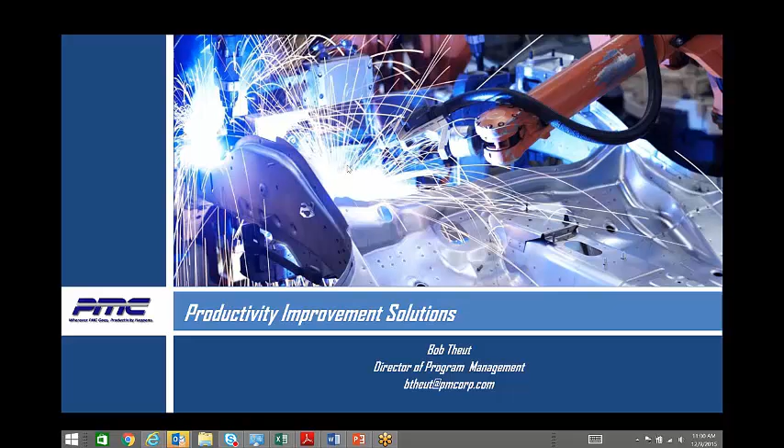We're going to go in there this morning. As Danielle talked about, we're going to talk about some services that PMC offers and different tools that we can utilize to help your production and increase your efficiencies in your site.

PMC is an engineering manufacturing consulting firm. We're a full-service industrial engineering and IT consulting firm providing process improvement services and software to manufacturing and service industries. We utilize a solid mix of experience, knowledge, and creativity, and we always find ways to improve the quality, efficiency, and productivity of manufacturing and service industries.

Some of our specialties in consulting services include advanced manufacturing, material handling, supply chain management, facility layout and design, CAD services, industrial engineering and lean manufacturing, simulation modeling, and program and project management. We also offer staffing and training services, including training in CAD, simulation, and MODAPTS, and many other services if you're interested.

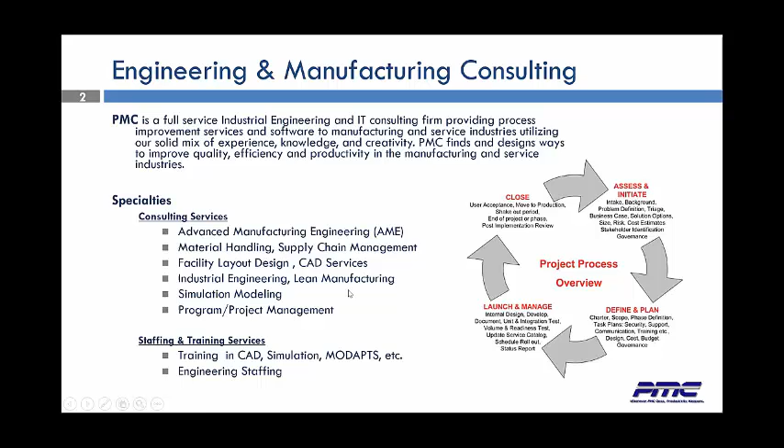In our advanced manufacturing and engineering, our expertise includes industrial engineering and work measurement, labor analysis and scheduling, ergonomic studies, Six Sigma, line balancing, and layout analysis.

In the simulation area, we include increased throughput, capacity verification, enterprise profit model, waste reduction, constraint management, work in process inventory, and direct and indirect labor utilizations.

We also go into lean manufacturing where we standardize work, process system simulation, value stream mapping, workplace design, and ergonomics. We look at workplace organization, better known as 5S, additionally 5T, waste reduction, the 7 wastes, SPC, error and mistake proofing, visual management, problem solving, and team concept.

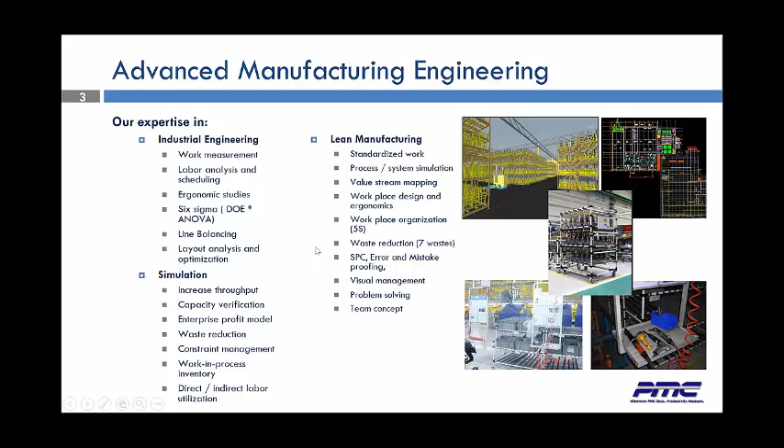Additionally, we do material handling. We look at material handling density analysis, resource allocation, production planning, flow and process management, inventory management, indirect labor optimization, Kanban optimization, and material display and part presentations.

In the digital engineering area, we offer CAD services including installation drawings, layouts, scanning, and conversion. We even go further into that—if there's more information you would like, please contact us. We do 2D and 3D design in digital engineering.

In supply chain management, we cover advanced planning and scheduling, network optimization, risk management, finite capacity scheduling, inventory reduction, project timeline and cost reduction, and material flow and layout optimization.

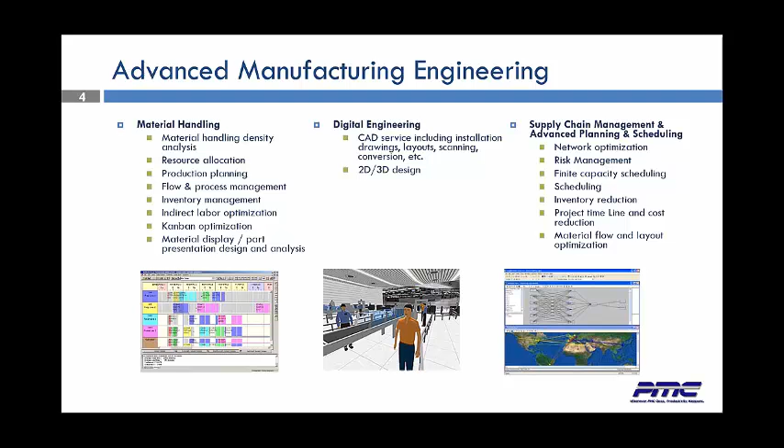Let's talk a little more about production control and material handling engineering. We look at the overall layout showing a warehouse, including the staging areas, the routing, the aisleways, any monuments, docks, and additional items within your warehouse. We also create detailed layout diagrams, 2D layouts, including stations and assembly lines.

We look at a station-by-station line display, which includes the material and also the equipment that the material is laid upon. A summary of the material handling equipment requirement is a vital part of what we also do.

We can show you and better right-size your fleet. We do a static dock analysis for future state dock analysis, including labeling and inbound and outbound. We look at all this to ensure you have the proper amount of dock space, or to see if we need to add additional space or redesign the area differently.

We also look at a storage analysis outside of the docks for future state storage space requirements, such as small lots, bulk, staging, empty racks, and finished engines, if that's the case.

In the material flow area, we look at the part delivery sequence. We can optimize the sequencing of the fork trucks and/or the tuggers, or even just the hand delivery of parts. We can better minimize the dollar spent to support the projects.

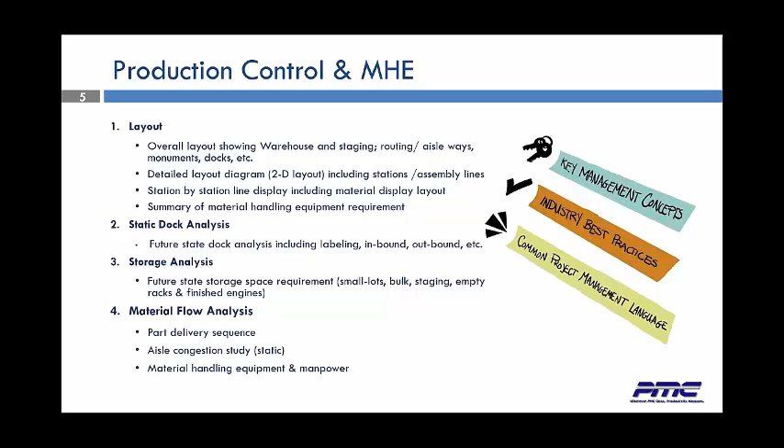We look at aisle congestion in a static or dynamic type, or a static simulation type study. We also look at the material handling equipment and the manpower required, and a better way to optimize that.

In the industrial engineering area, we look at different types of work measurements such as MODAPTS, MOST, and time and motion studies. Those three are different forms of calculating the amount of time it takes to do a particular task or many tasks, or possibly even looking at the overall operation of your plant or operation.

We do a labor analysis, labor scheduling, and workstation design and optimization, as we talked about before. We like to concentrate in the ergonomics and Six Sigma areas also. So, a little more on material handling.

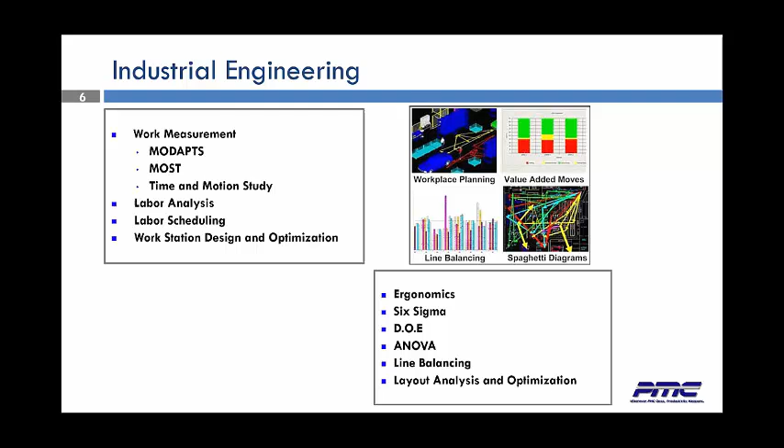In material handling, we usually start out building a PFEP database. PFEP stands for Plan for Every Part. We'll go further into exactly what a PFEP database is in the next few slides.

We really concentrate on the material display, ensuring that we optimize all that. We look at the kitting, the sequencing, and sub-assembly area design, sometimes called cells. We look at delivery route design and workload balancing to ensure that the fork trucks and the people all have optimal workloads.

We try to keep the workload at the 90 to 92% range. We look at dock and storage analysis, and engineering and visualization services. We'll look at laser scanning and 3D modeling. We'll also take a look at some F&E equipment, facilities and equipment, looking at special containers and new equipment orders.

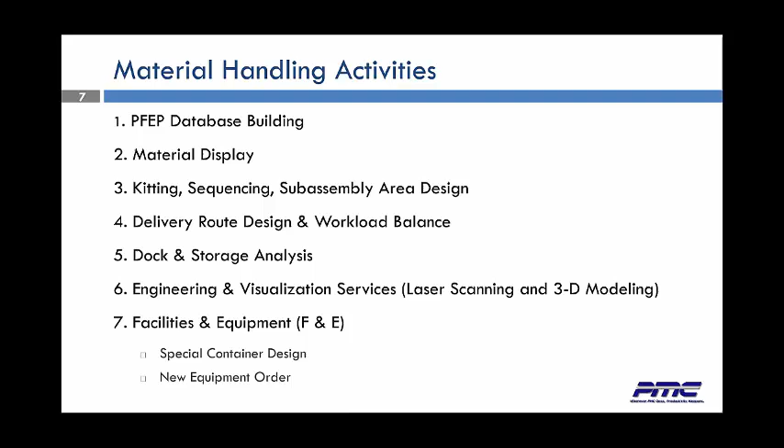In the plan for every part, the PFEP, some of the information you might see in it is part data, which consists of part number, part name, part description, program, the variation, the part weight. We look at supplier data. We look at containerization data.

We also look at any sub-data, subassembly data, such as the delivery route, the delivery method, supplier container number, and the location that will be used. And we'll take a look at the final assembly data. All this information is put onto one spreadsheet or one database, depending on what you prefer, so that it can be used by each and every department rather than every department having their own little category.

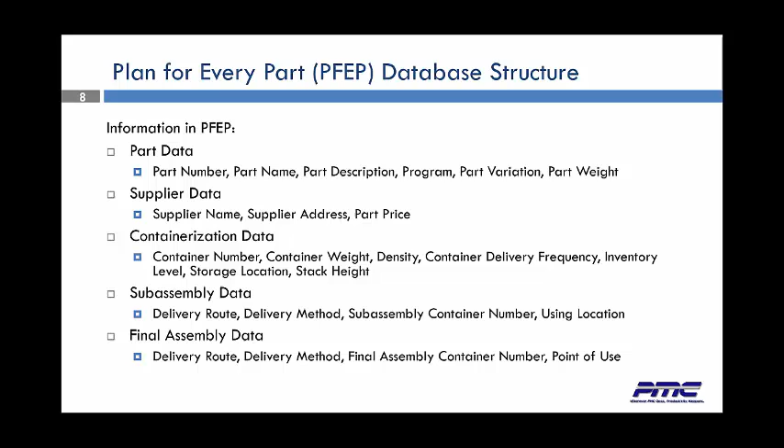By minimizing the amount of space utilized, we can maximize the safety and also maximize the golden zone, which we'll talk about a little bit more. We minimize material handling by eliminating MURIs, which are difficult and unnatural operations, also MURAs, irregular operations, and MUDAs. By doing all this, it automatically improves the workplace ergonomics.

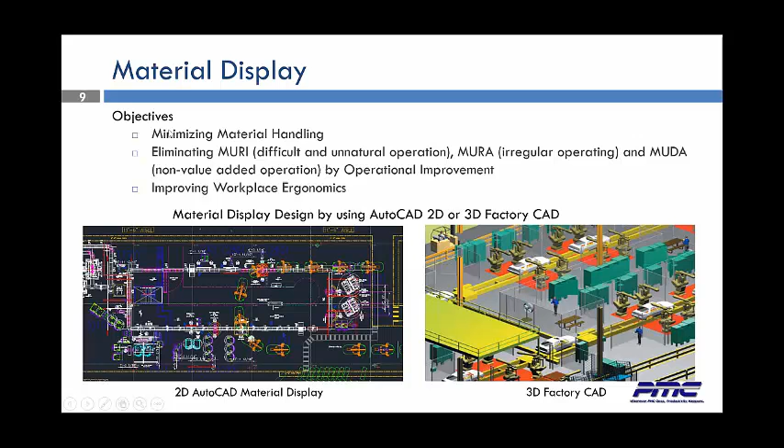In the material display, some of the methods we'll use to optimize everything are a single pick point or even a single pick face. We use different pieces of equipment such as turntables, gravity flow racks, ensuring that we're always within the golden zone. We'll even use kitting, risers, and ergonomic platforms as required.

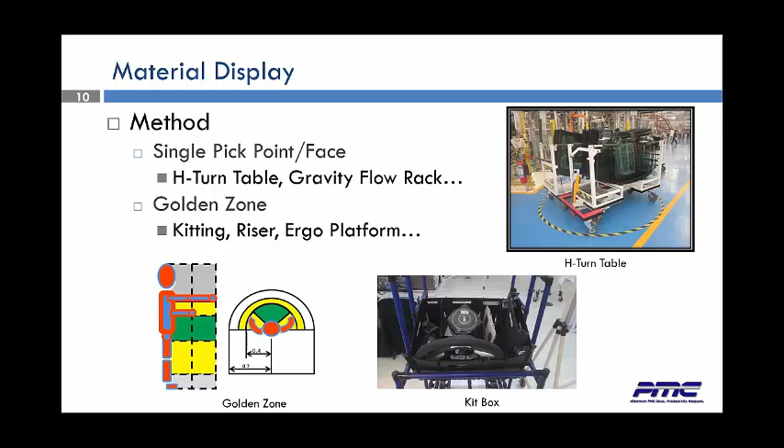Some of the material flow logistic guidelines we follow: we always present parts in the golden zone. You might be asking, what is a golden zone? A golden zone is an area directly in front of the operator, where they don't have to turn around, where they utilize a minimal amount of movement in order to put the parts to the line or put the object where it belongs.

This might be a better way to say that: thereby never having to turn around if possible, and not having to reach too far or take steps in order to do it. We can minimize the amount of time it takes to actually do the task, thereby speeding up the production.

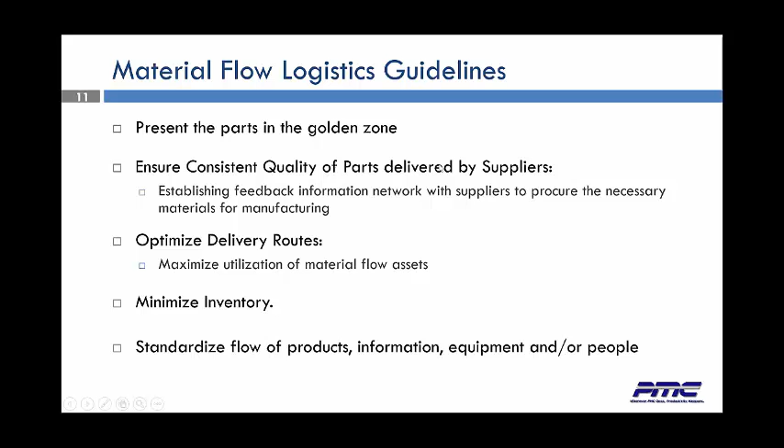We always optimize the delivery routes by maximizing utilization of the material flow and the assets. And we minimize your inventory. Inventory is an extremely expensive concept and it takes up a lot of floor space. So if we can minimize it, we can give you additional room to bring on additional work and additional customers. We look at the standard flow of the products, the information, the equipment, and even the people, by optimizing each and every one of them.

The delivery route design and workload balance objectives are to reduce indirect labor, standardize the delivery procedure, reduce material handling equipment and investment, and reduce aisle traffic congestion. If you take a look at the examples we have, you can look at the example of tugger routes and the before and after of the routes. Thereby, we actually eliminated one complete fork truck and also driver.

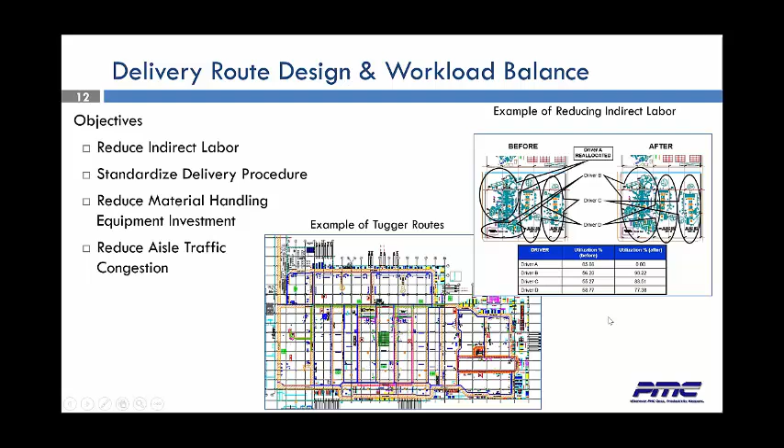The savings could come out to hundreds of thousands of dollars in a year, depending on the type of equipment you're using. One of the big ways we reduce all this is by looking at kitting, sequencing, and sub-assembly cells. The question might be, why do I kit?

Well, you kit for productivity purposes. It minimizes the movement of the operators, it places all the parts always in a golden zone. The quality is increased, you minimize the risk of assembling the wrong parts and additional rework costs. It's very flexible, minimizing cycle variation and build mixes.

You can also compress the line, as we talked about before, thereby allowing you to place parts in the proper area in the proper cell. It's also easier to learn, very easy to learn how to kit and how to do it, so it gives better working conditions and easier training.

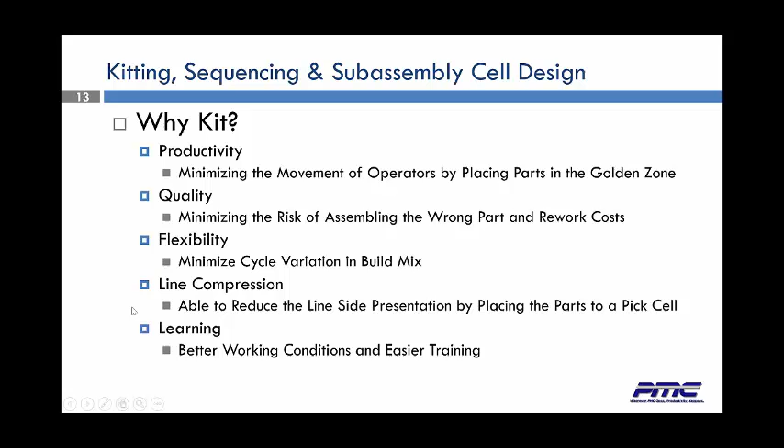Now there are 3 different types of cells that are very confusing: kitting, sequencing, and subassembly cells. Though they're all very similar, they are actually different, and that needs to be kept in mind as to what you're doing. If you look online, there are additional webinars that relate directly to these.

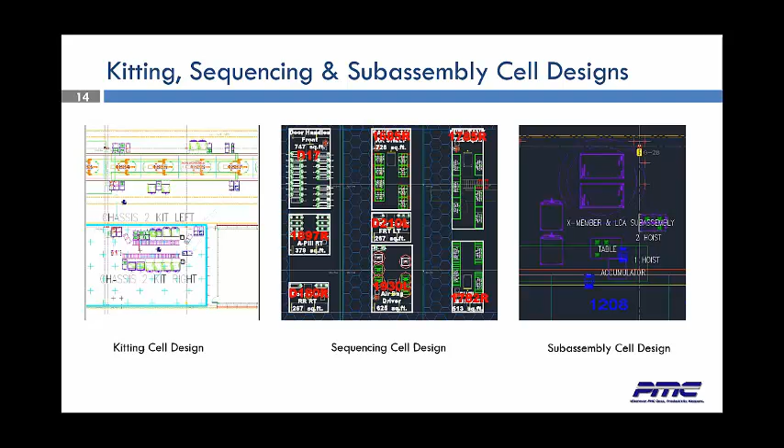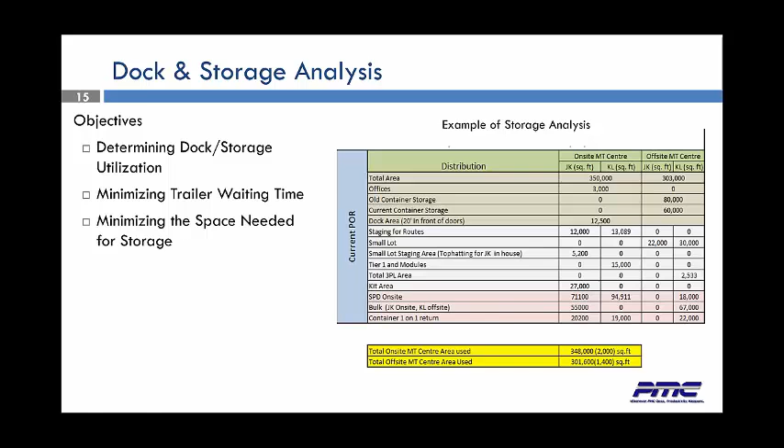We have the ability to build our carts, design them, get them sent out, and bring back the pricing to the customer in a no-stress manner.

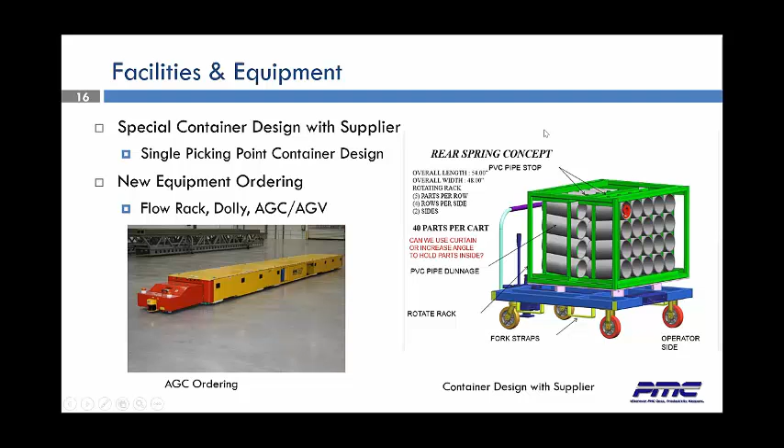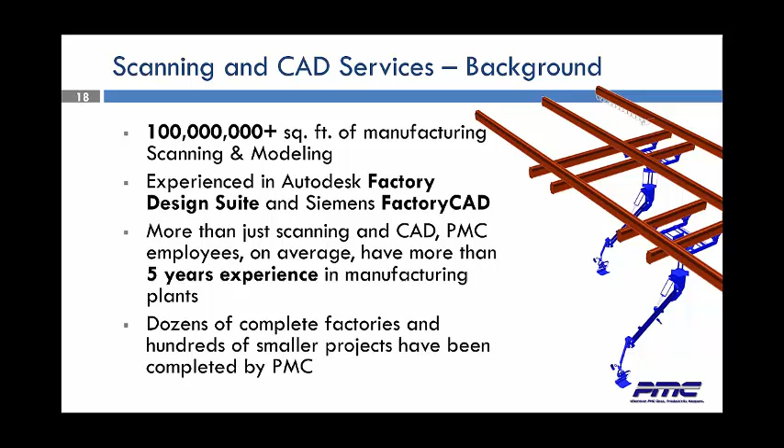We're more than just scanning and CAD. PMC employees on average have more than 5 years experience in manufacturing plants, so we know the plants very well and can work very safely. We've done dozens of completed factories and hundreds of small projects completed by PMC employees.

If we were using the software we spoke about earlier, we'd be able to manipulate all this - move any object we wanted and place it wherever we wanted. We can measure it, turn it, and look at every angle of it.

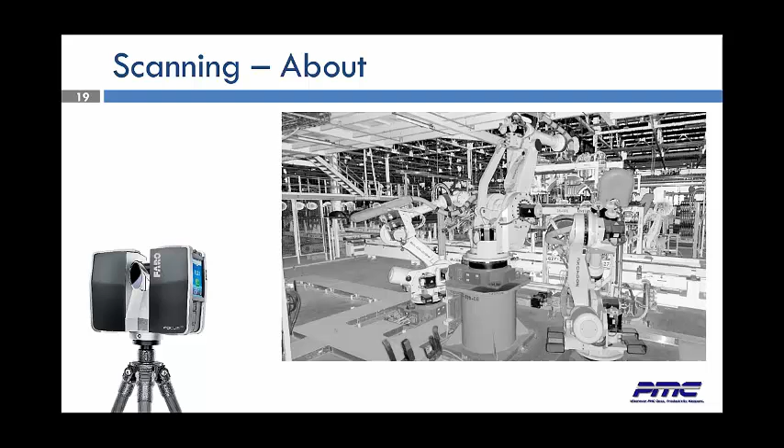This shows a little bit about the scanning history and where it started back in 2008, and how many scans per day a scanner could possibly do. Back in 2008, we could only do about 24 scans a day, as compared to now, where we can do up to 185 scans a day, which really decreases the cost to the end user.

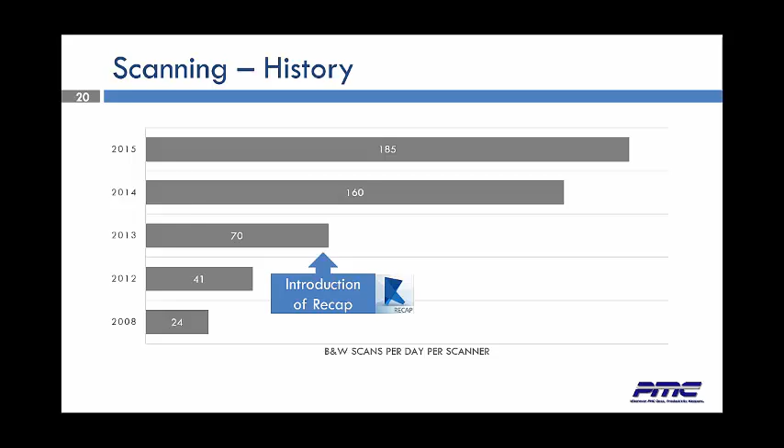So why should we scan now? Well, as we just talked about, it's really no longer an experiment. The cost is lower, it's easier to capture, convert, and use. We can do it without placing targets all over the plant, and we can do cloud to CAD conversions.

It's not always required, but we can do it. And it's native support in existing CAD applications. That is to say, we can lay it right over top of your existing layout.

Over to the right, you'll see the same robot cell. However, this time you'll see it in a color display. Once again, this is a 3D layout. So everything can be grabbed and manipulated and measured just as you would in your standard 2D CAD.

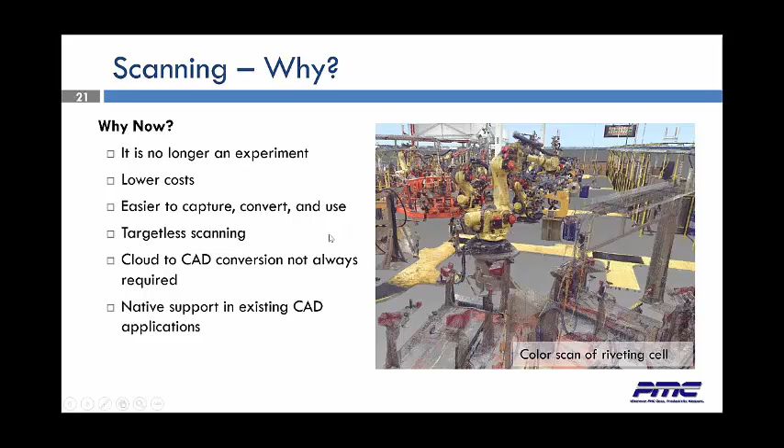Once again, like we said, we can capture 100,000 square feet a day or more. The accuracy is undisputed. We can get down to 1/8 of an inch accuracy. It's got the ability to view, measure by anyone, anytime, even during the meeting, as we just said. The data acquired has multiple uses and multiple sharing capabilities. It is an enabler to change or shorten the design process.

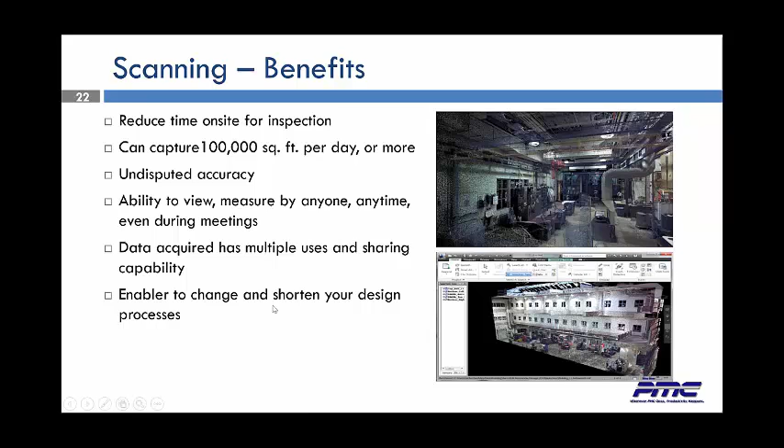PMC has been modeling 3D factories for over 15 years. We have millions of square feet modeled, and we're a highly effective offshore team, which enables us to reduce the cost to the end user. Looking below, once again, this is another 3D layout.

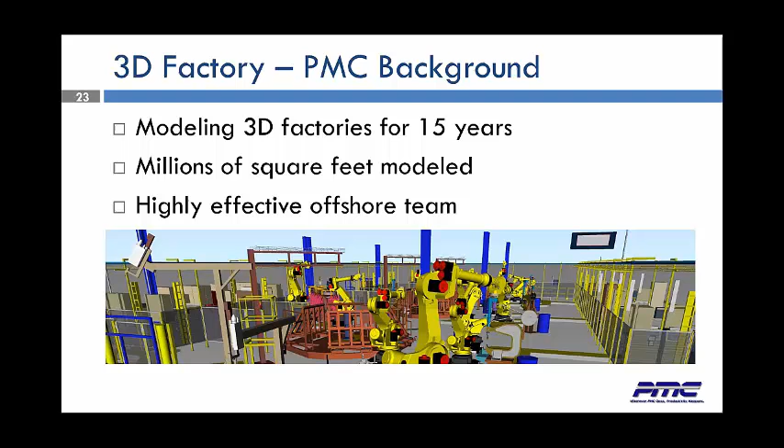Some of the history of 3D factory. Back in 2000, we began the development of the 3D factory with an initiative with General Motors. We developed a strategic relationship with FactoryCAD. We began working with the laser scan data in CAD and kicked off projects at Ford and Toyota for 3D factories. We converted a dozen assembly plants, developed a library of smart factory objects, which now will decrease the cost to an additional end user because we can use some of those objects to do your layouts.

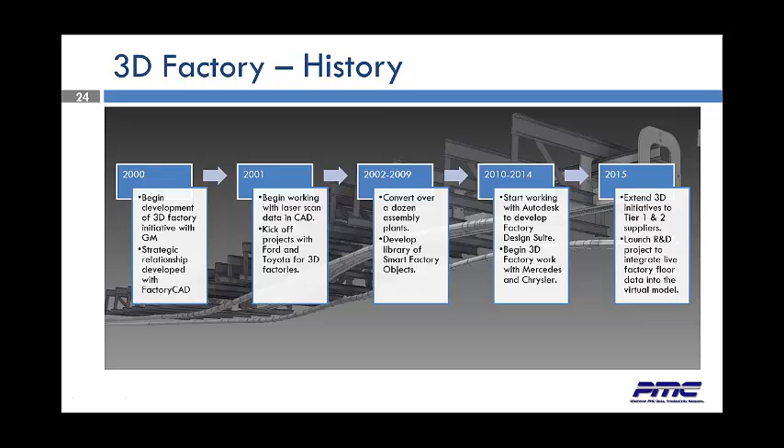Working with Autodesk to develop factory design suite. We began 3D factory work with Mercedes and Chrysler. Now in 2015, we extend the 3D initiatives to the Tier 1s and the Tier 2 suppliers. We launched an R&D project to integrate live factory floor data into the virtual model, which is something we just looked at in the video.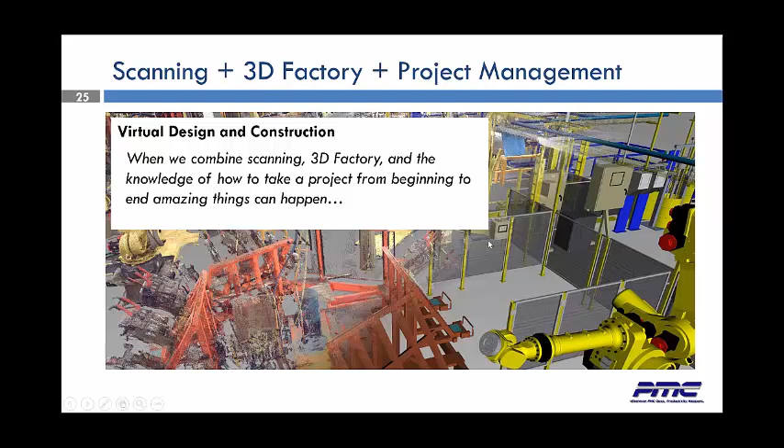Virtual design and construction. When we combine scanning, 3D factory, and the knowledge of how to take the project from the beginning to the end, amazing things can happen, as you can see below. This, once again, is a 3D layout. You can see here where an oven was going to be placed within a factory, and it was difficult to figure where this oven was going to go and how to even bring it in.

Utilizing the 3D factory, we were able to carry the oven through the factory and actually put it into place without having to remove any portions of the roof. Major cost savings to the end user.

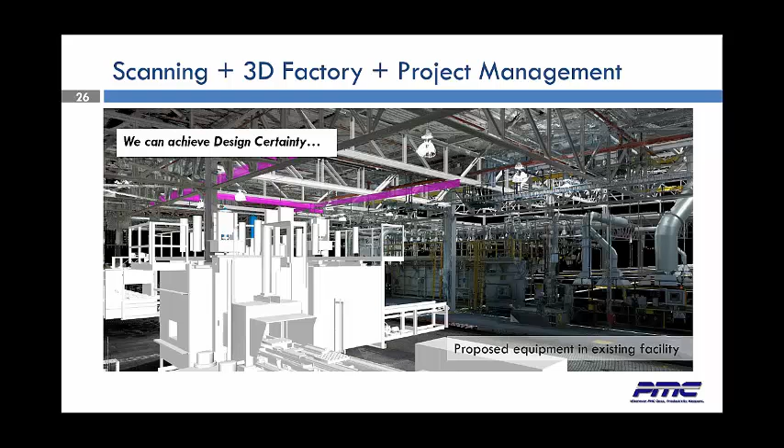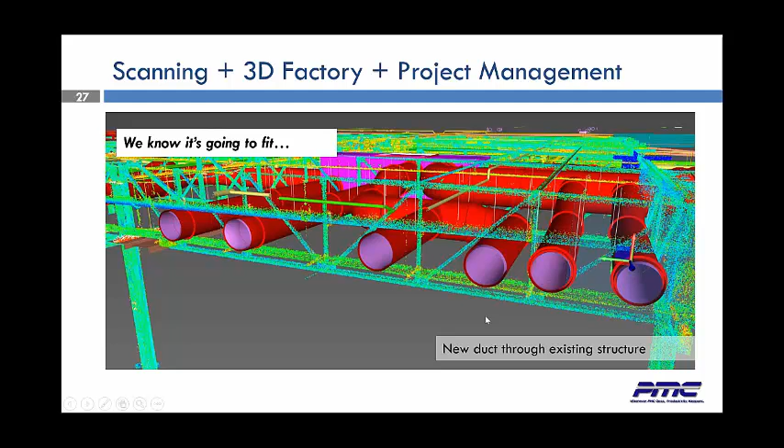Here we can see some ductwork where it's being put into the rafters, and you can see where we're going to have some deflection and where we might have to move something, where we may have to cut some, or we may have to even change where the ductwork is going to go. So we can pre-plan and we can follow our plans exactly, thereby eliminating any rework.

Speaking of rework, if we take a look at where we started, back with traditional 2D layouts, you can see the initial base cost of a contract. Looking next to it, you can see what the field order ended up being. Adding those two together, the cost is nearly doubled.

As we moved on, we were able to reduce a little bit of the base cost and reduce a little bit of the rework. And getting further on, you can see that the rework is going down even further. Now, with the advancement of the 3D factory CAD, we can bring the rework down to nearly 0%. I think we're probably looking at 2% here, looking at that number.

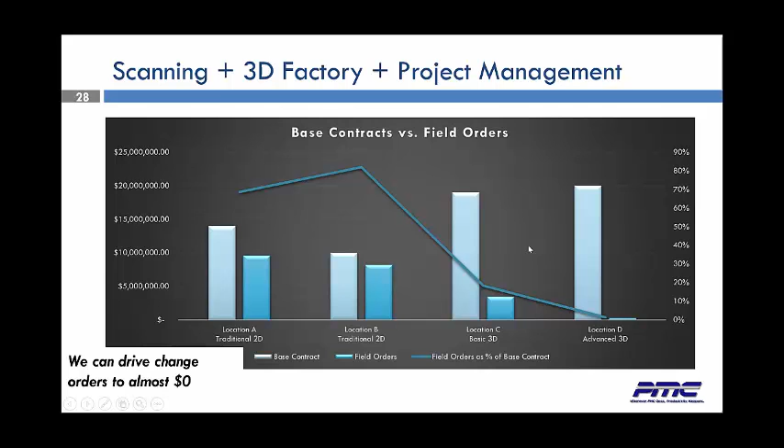Some of the typical challenges in manufacturing that we specifically address: we can adapt quickly to growing and fluctuating demands, the over and underutilization of resources, batch sizing and sequencing of systems with product mix issues.

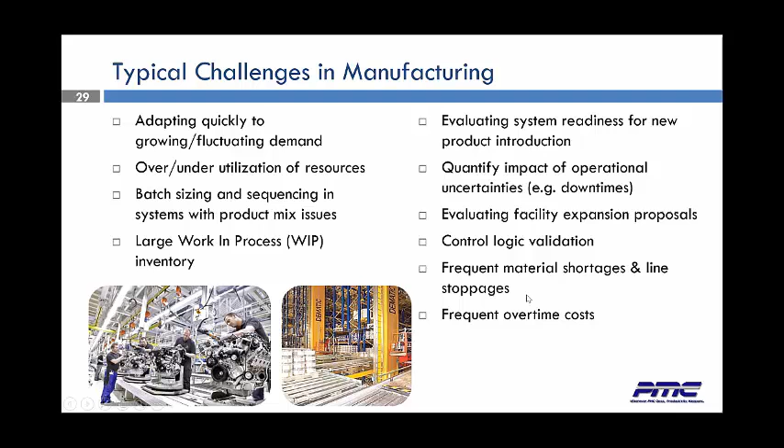We can look at a large WIP area, work in process, evaluating systems for readiness for new product introduction. We can quantify the impact of the operational uncertainties such as downtimes. Evaluating facility expansion proposals. We can control the logic validation and frequent material shortages and line stoppages and frequent overtime costs. We do this by looking at simulation modeling and analysis.

The simulation modeling analysis mimics the operation of a real system through time. Statistical distributions to capture the system variability. We can use what-if analysis, giving us KPI quantifications, operation strategy, decision making, and all this is done in computer graphics for visualization purposes.

Over on the left you can see the order in which we do this. We look at a scope and the objective, we go through the data collection and the model building, we look at a verification process and a validation process, then we do an analysis. Then we begin to do the what-ifs and experimentation area, and we come back with our reporting to you.

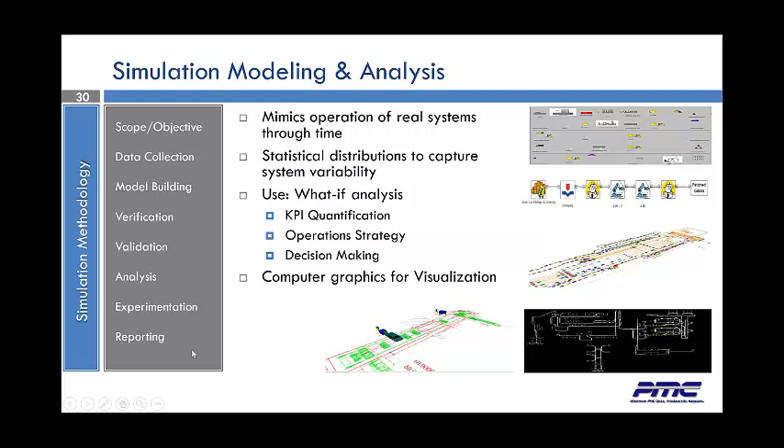Some of the value added with simulation is from the conceptual phase, from the layout to design validation, with the capital investment analysis, and the process flow design. In the build phase, material flow analysis, labor requirement study, sensitivity analysis, and model mix. In the operational phase, we look at a line-side delivery improvement, resource optimization analysis, and new model introduction, the study and the impact and the variability.

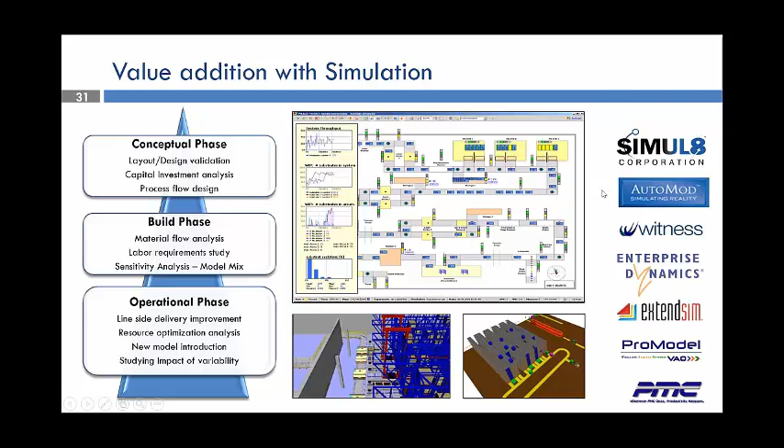So why dynamic simulation? Leverage the what-if scenarios to accurately estimate minimum indirect labor staffing levels to support production. Identify and eliminate the excess inventory on line side as well as in the marketplace. To identify and eliminate the risks and inefficiencies in material flow design early in the program. And we also provide the 3D animation, the material flow design, to the key stakeholders to facilitate the communications.

And we create a robust design by considering dynamic interactions between the systems and entities based on the current and future needs. So what we're basically saying is we can actually look at the future and tell you what you're going to need if the data that we're being given is correct.

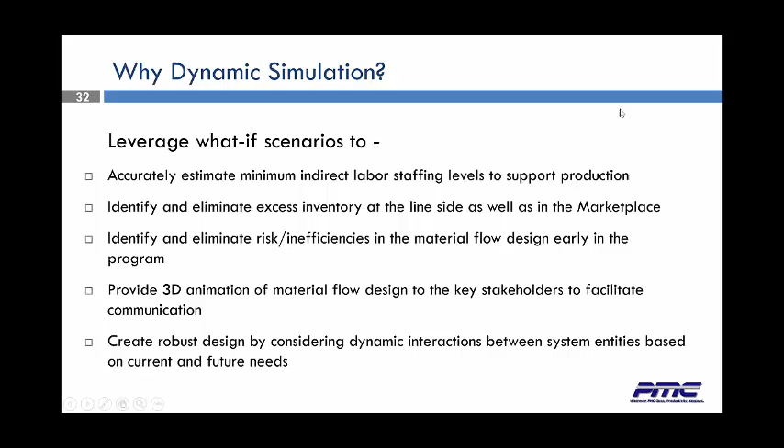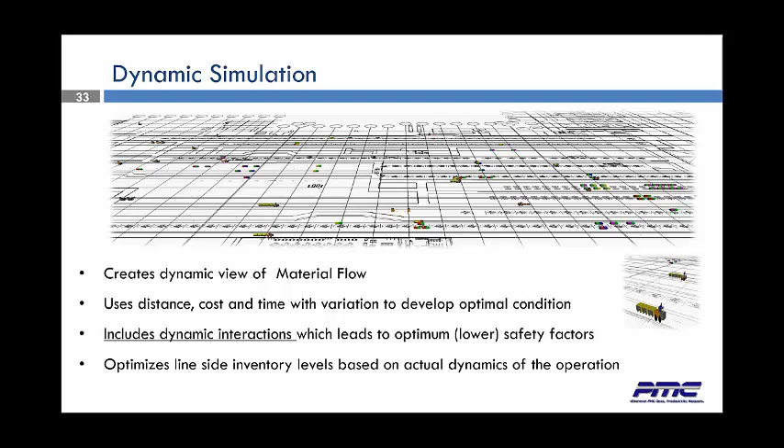Now, I would like to say one thing. We are talking about simulation within material movement. However, I do not want anybody to think that simulation is only used in materials. So simulation can be used in nearly any event, from looking at the traffic on a road to looking at the human traffic within a stadium possibly. Even looking at how to operate a kitchen area or a bank. So there are really very few limitations to where simulation can take us.